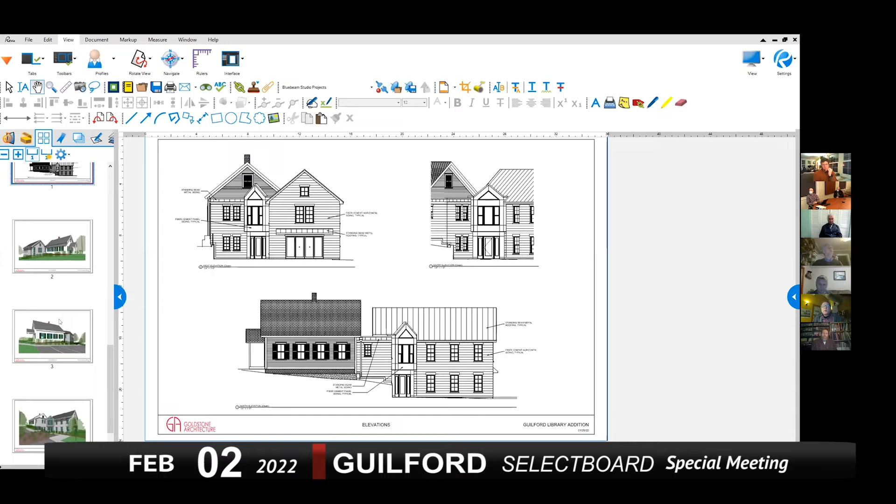And then I'll just show you a couple of the colored images of the proposed addition relative to the existing building.

This is looking at it from Guilford Center Road, representing the goal of creating an addition that is secondary to the historic structure but still complements it architecturally. We're proposing a wide horizontal fiber cement siding with a 9-inch reveal, as opposed to the historic structure's traditional clapboard siding with a 3-inch reveal.

The addition would also have a standing seam metal roof, as opposed to the slate shingle roof. This is a view from the corner of Guilford Center Road and Carpenter Hill Road, showing the addition dropping off with the slope and continuing to the west.

This would be from the lower end of Carpenter Hill Road, approaching the building from that side parking area where the handicap parking space is. You can see the at-grade access to the entrance, the stair, and the access going around to the front.

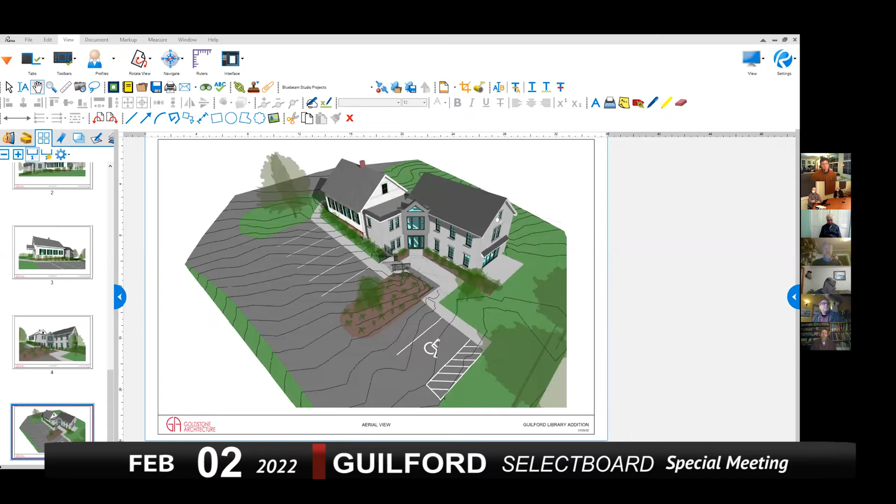I just want to make one clarification - there's a couple of goals here. The design was intended to accommodate an overworked library space, meaning the programs and services the library already offers. Number two, it's designed to make it accessible - the elevator is an important feature of that. And number three, we're required to bring the building up to code, which includes a lot of the energy features Jack was talking about.

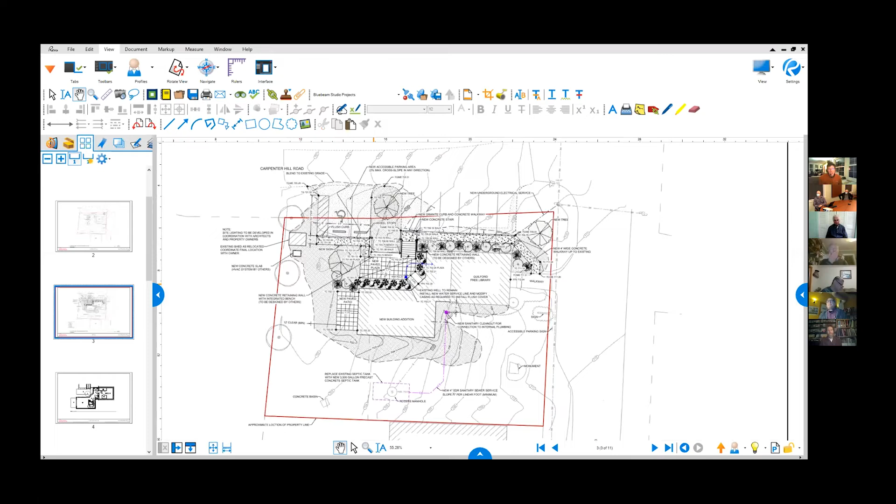All right, let's see. So Jack, can you get rid of the toolbars on the top of your screen? Yeah, you're fine, maximize it as much as possible. Can you see it okay now? Yeah, Laura, does that help you out? I just wanted Jack to get really specific about the plaza area, that would be great.

So the plaza, this is the area of the plaza right here, this grid pattern in a rectangular shape with a corner cut off of it here. It's roughly 10 feet by 20 feet, something like that. And with a proposed stone bench on this one side, a stair coming down from this upper level parking area.

This is a little pathway to the entrance door of the new addition, and planting areas that are adjacent to the building, between the building and the plaza. And extending that planting area, this is what I would propose, would be to extend that planting area out so that there is some separation visually and from a pedestrian access situation between the plaza and the patio.

So if there is an activity going on with kids or adults or whoever, and they're out on the patio, there's not an opportunity to think that that's the entrance to the building and come in this way.

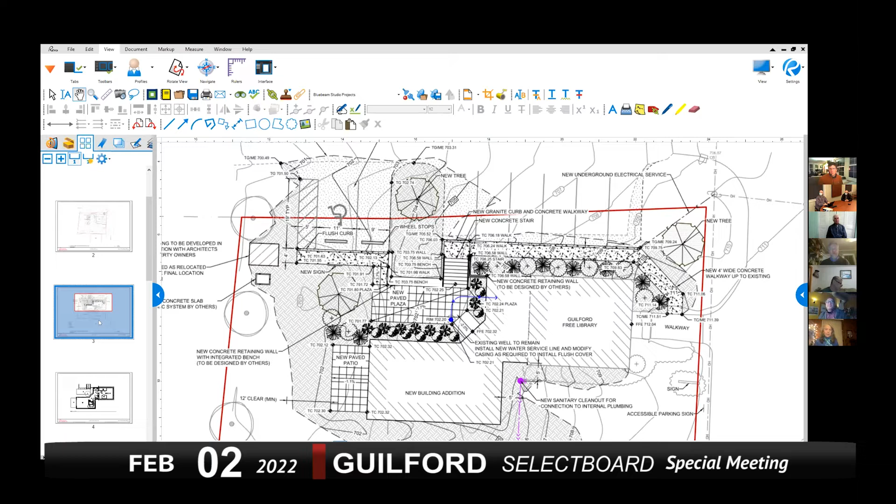And I guess I can also just, might be good to see these images again in the 3 dimensions, so you can kind of get a sense for it a little bit better in 3 dimension.

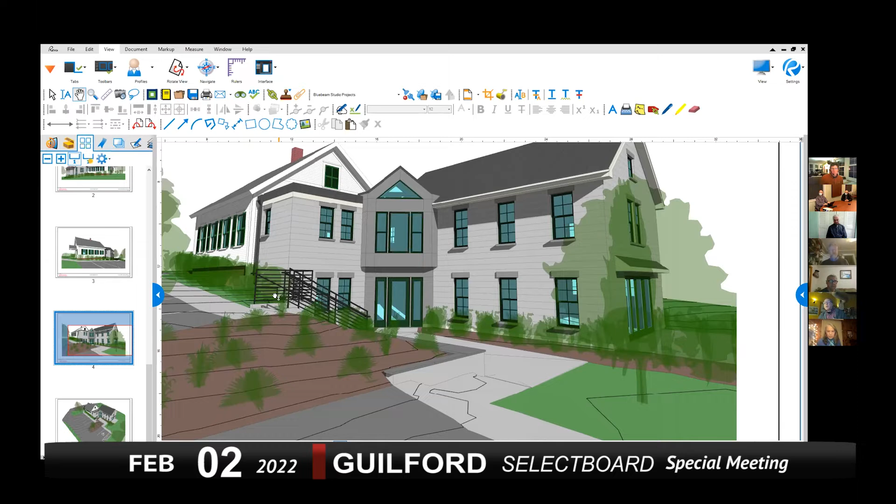These are not realistic images, but you can see this sort of partial wall here as a bench, and the plaza behind it, the plantings coming out. This is that planting area that makes the transition in grade from the higher level down to the lower level here, and the stair with the railings, the higher level here.

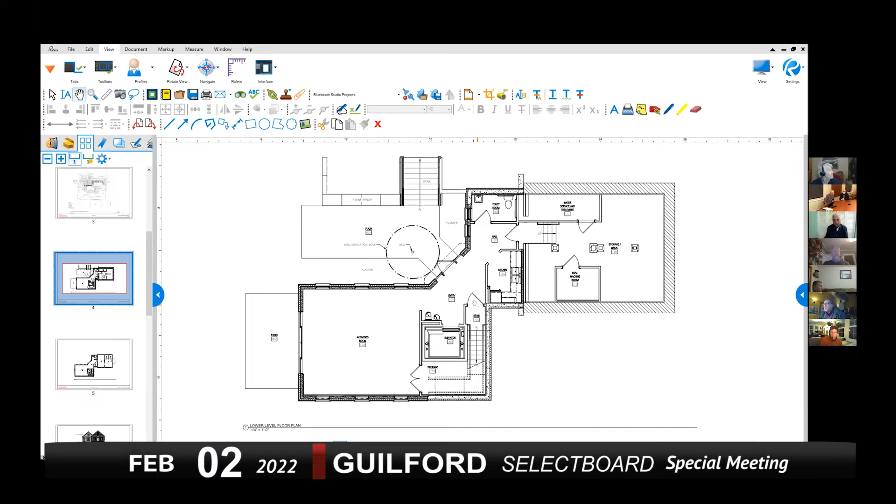This door can, depending on time of day and operations, be left in its open position so that you can just walk directly upstairs and talk to Kathy. Or it can also be locked in the event that there's an activity going on and utilizing the lower level without the library being open.

And what happens if you're mobility impaired and you get yourself in that door? If you're mobility impaired, you've got access to the elevator right here, right from this same entry area. Enter the elevator here, and that will take you up to the upper level, and you get out right into this lobby space, right at the librarian's desk.

Just for the sake of argument, what happens if I'm catering? I've got a bunch of people we're meeting, and I have catered food, and I bring it in that door. Well, what if I want to put it in the fridge? You go to the kitchen right here. So the entrance door is right here, and the kitchen is right around the corner, right behind this wall. So pretty easy access there.

Does anybody have questions about, since we have Jack with the floor plan up on the screen right now, does anybody have questions about the floor plan for either level?

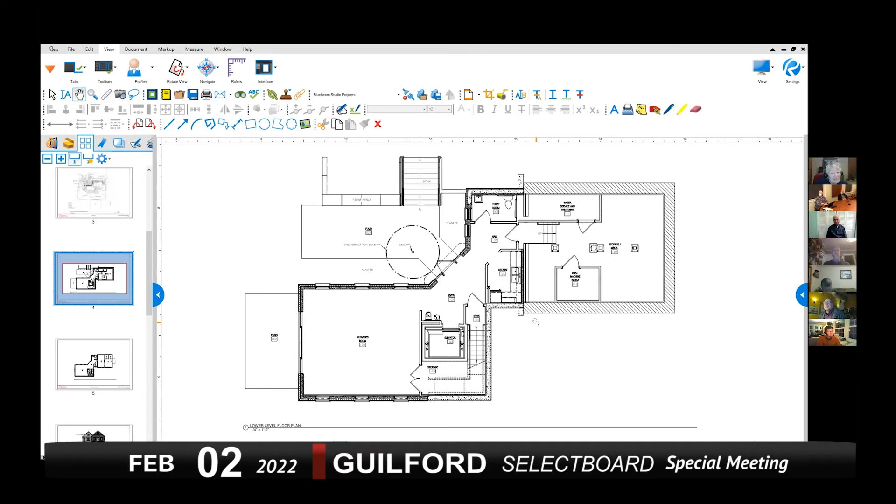So it looks like we have a new person who has a question. I'm sorry, I don't know what your name is. M. Wisman, hi, Mary is my first name. Thank you, Mary, please go ahead with your question while I switch over to Isaac.

It's a beautiful design, it's very exciting. I do just have a question. You mentioned grant money and gift money and more to raise. I'm just wondering how much money are you going to be asking from the taxpayers? Good question, and I will get to that.

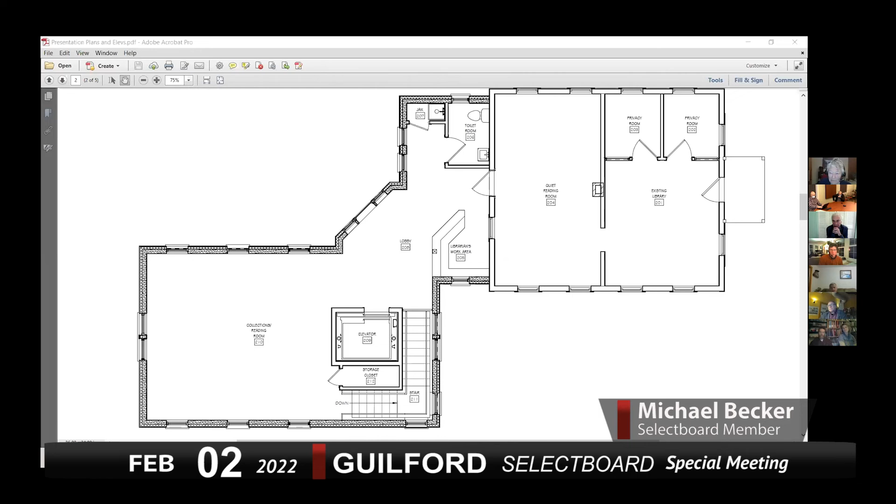I have a question, Michael here. I was wondering if that patrons usage number accounted for the kids using it, the camps in recent years. I'm pretty sure it did. Kathy's pretty diligent about reporting to the library network. You can go online and pull down spreadsheets of all the different libraries who report their activities in the state of Vermont. That's what I did, so I'm pretty sure it accounted for that at the time.

Kathy, do you have a sense during the COVID era, did summer camp attendance or activities increase? In fiscal 20 it did not, but by summer of 21 we were back to normal. The year before, the first year of COVID, we were lower for summer programs. Not many people used the library.

Before I answer another question, I want to quickly introduce our volunteer committee members who worked with us on this design and framed it. They include Kathy, of course, Michael Becker—is Michael here someplace? Town office, yeah, Michael's there live. John Shaw, of course. We have Nika Fotopoulos, who was also on our committee. And Richard Wazansky participated as well. I don't think I'm missing anybody.

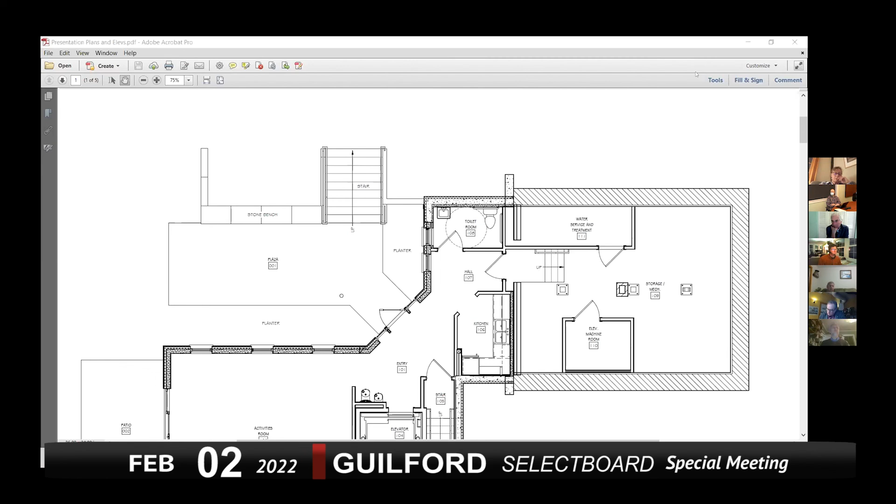Thanks again, Peter. I have a quick question that I think will help the community as people go to vote on all of this. Is there someone who could break down and speak to us about the scale and breakdown of funds? We have the town of Guilford funds in hand at 518,000, and I personally hadn't seen a lot about the fundraising - if someone could tell us a little bit about what that looked like. But mainly the 518 - I know a while back Sheila Morris mentioned that 300,000 had been transferred, and where did that come from? Where's the money being moved from and to for the library? I think that would help the community better understand.

I could put that graphic back up, Peter, if you want me to. I just gave you host powers, Isaac. Okay.